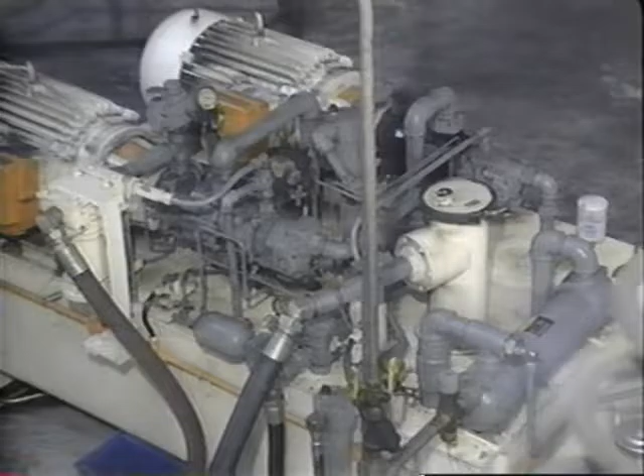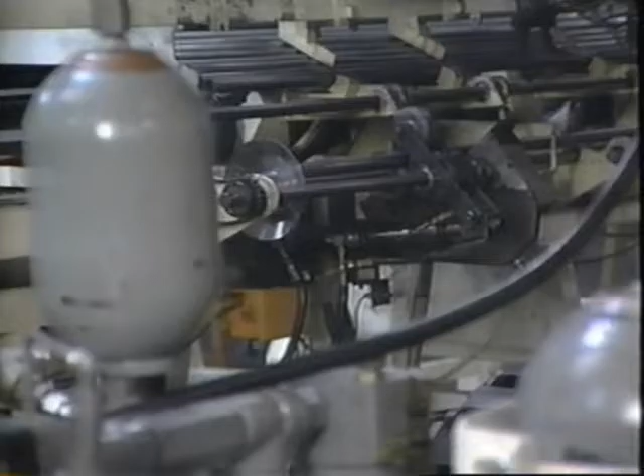Today we continue our study of industrial hydraulic technology with the hydraulic transmission of force and energy. In hydraulic systems, energy in the form of pressurized liquid flow is transmitted and controlled through a conduit system to an actuator at the point of work.

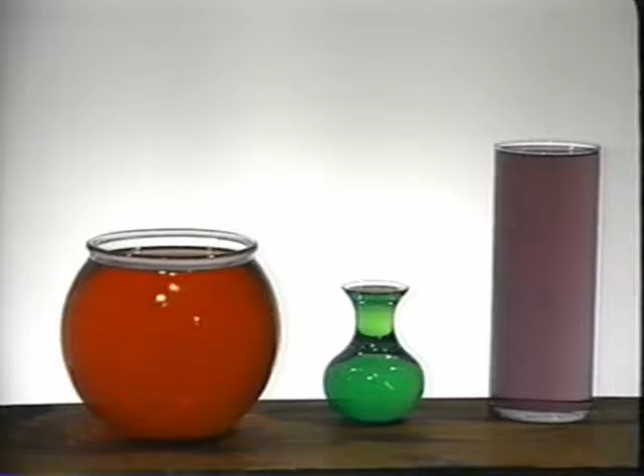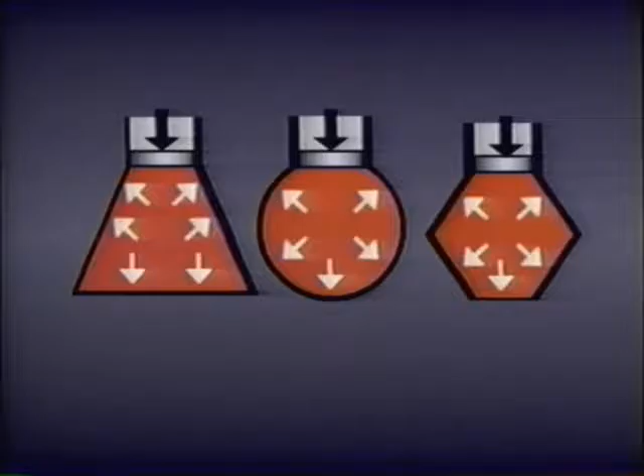Liquids have a few characteristics which make them an excellent means for transmitting energy. They take the shape of any container you put them in. They are relatively incompressible, and when a force is applied to a confined liquid, it is transmitted as pressure equally in all directions. This particular characteristic of liquids is called Pascal's law, named for the man who first discovered the relationship of force, pressure, and area.

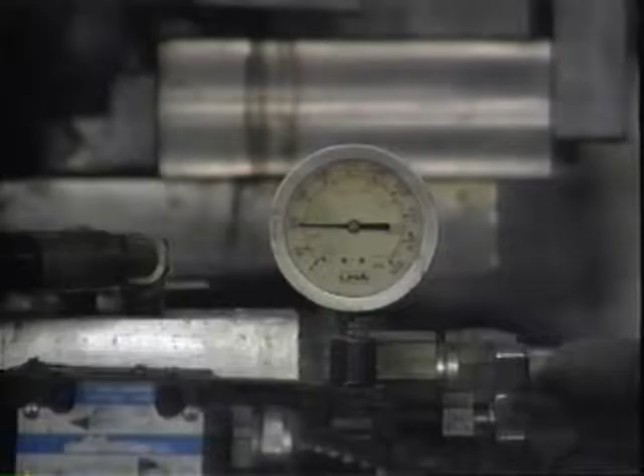Pascal's equation looks like this: pressure, usually measured in pounds per square inch, is equal to force in pounds divided by the area in square inches. Monitoring the pressure of the fluid is one way to determine how well the system is operating.

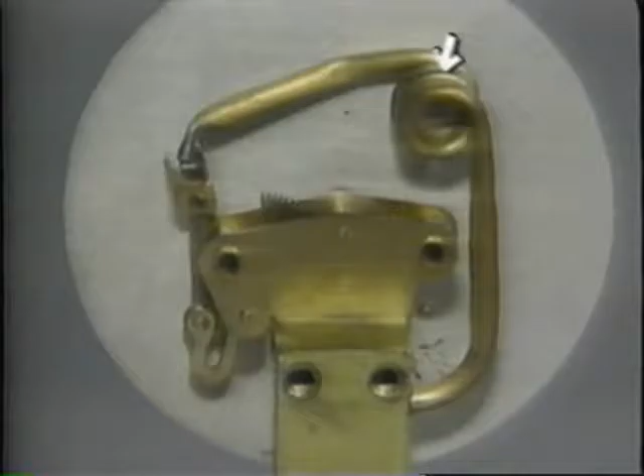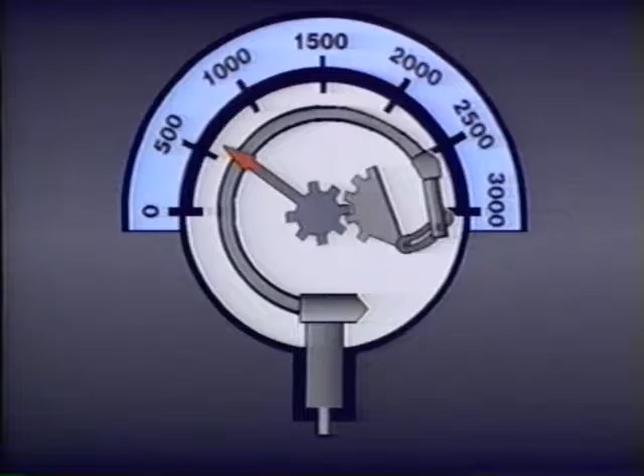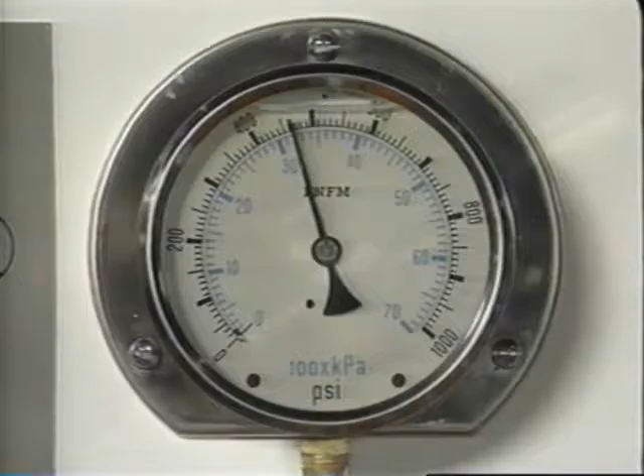Bourdon gauges are precision instruments, capable of readings as accurate as 1/10 of 1%. But they are relatively delicate, and the pulsations in most hydraulic systems could quickly damage them, unless some provision is made to isolate them when not in actual use.

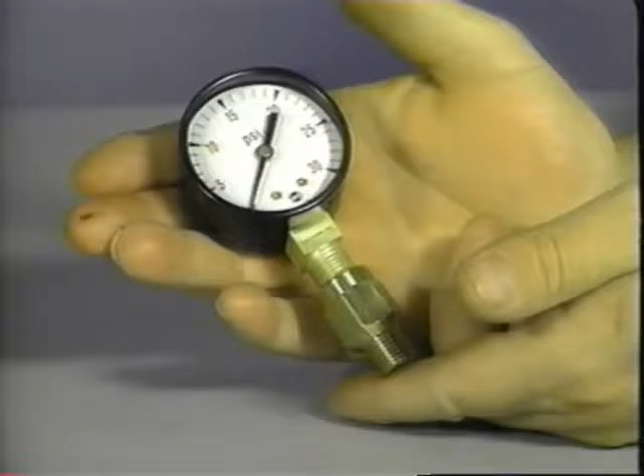Sometimes a device called a snubber is used. It's installed in the line between the gauge and the system. It works by stopping or restricting fluid flow to the gauge, so any pressure surges or pulsations are smoothed out before they reach the gauge.

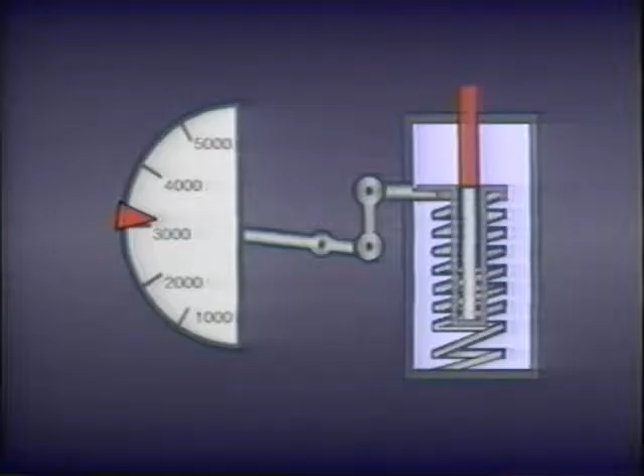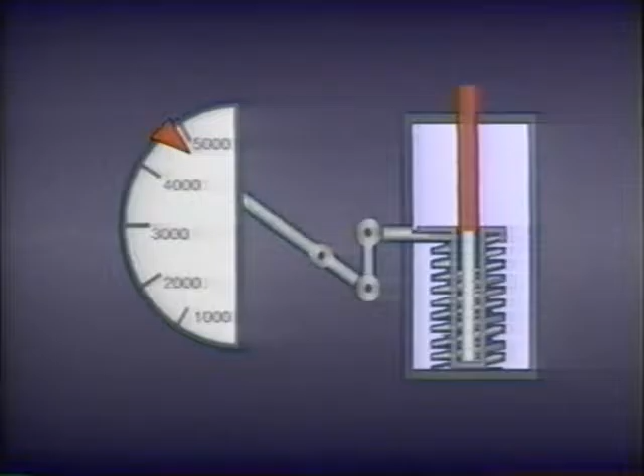The plunger gauge consists of a movable plunger connected to system pressure, a bias spring, a pointer, and a scale calibrated in pounds per square inch. As the pressure in the system rises, the plunger compresses the bias spring. As the plunger moves, so does the pointer connected to it, indicating the appropriate pressure on the calibrated face. While not as accurate as Bourdon tube gauges, plunger gauges are a more durable and economical means of monitoring system pressure.

Now, to convert hydraulic pressure into mechanical force, we can use various types of actuators. The most common type of actuator used in hydraulic systems is the cylinder. Hydraulic cylinders take hydraulic pressure and change it into a straight line mechanical force. This straight line force is frequently called linear mechanical force.

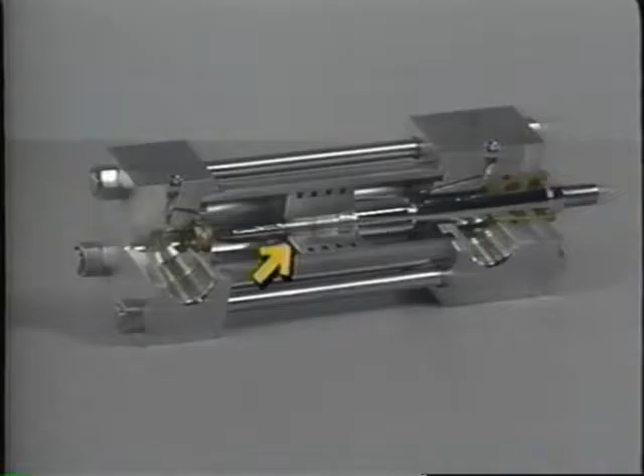Hydraulic cylinders basically consist of a cylinder body, a piston rod attached to a movable piston, and a closure at each end. This is called the rod end because the piston rod goes through it, and this is called the cap end. Most cylinders have holes called ports at each end. The inlet port allows the hydraulic fluid to enter the piston chamber, and the outlet port allows the fluid to exit.

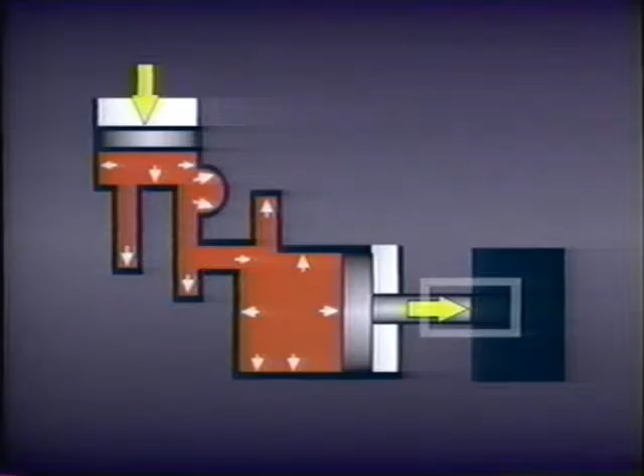When a force is applied at point A here, the resulting pressure is transmitted to the piston in the cylinder. The pressure pushes on the piston, resulting in a mechanical force here at point B. Remember that one of the major advantages of hydraulic systems is that they can be used to generate large mechanical forces. Let's say we want to use 5,000 pounds to move a 7,500-pound load.

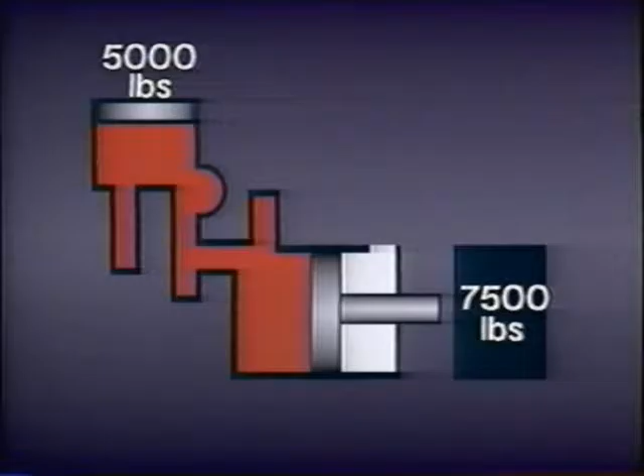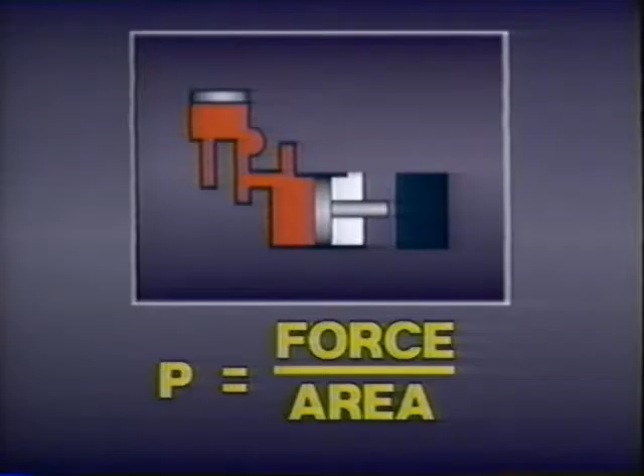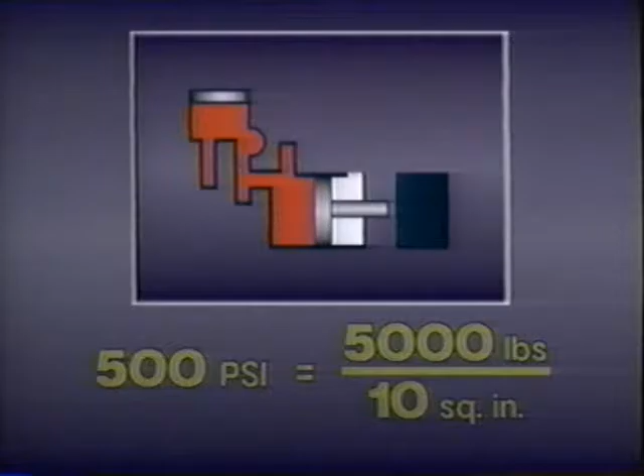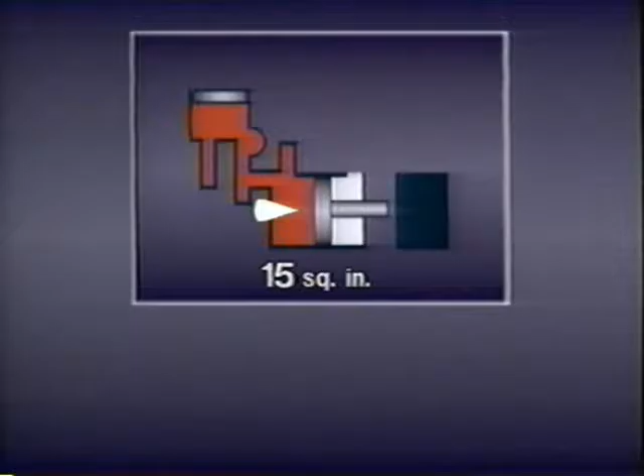Here at the input end, we apply a 5,000-pound force on a piston with a 10 square inch area. By applying Pascal's law, which says pressure equals force divided by area, we come up with 5,000 pounds of force divided by 10 square inches of area, which gives us 500 pounds per square inch of pressure in the system. So here on the other side of the piston, we have 500 pounds per square inch of pressure pushing against this larger piston, which has an area of 15 square inches.

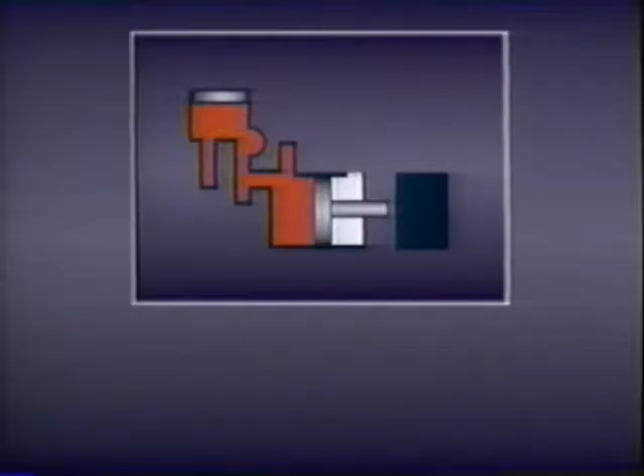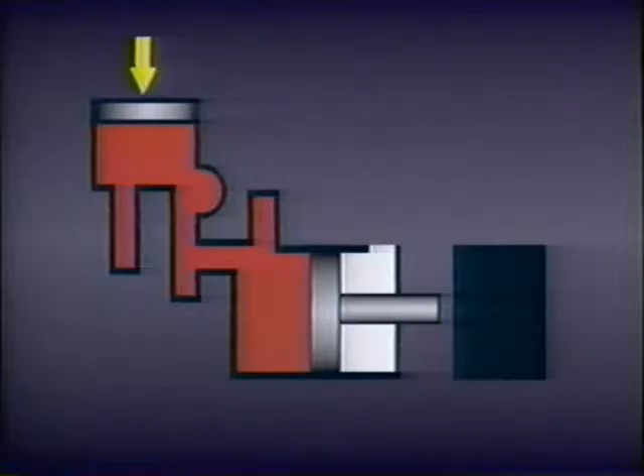Now, since we already know the pressure, we want to find the force here. Our equation becomes force equals pressure times area. So our output force is equal to 500 times 15, or 7,500 pounds. We are able to increase the force of a 5,000-pound weight enough to move a 7,500-pound load.

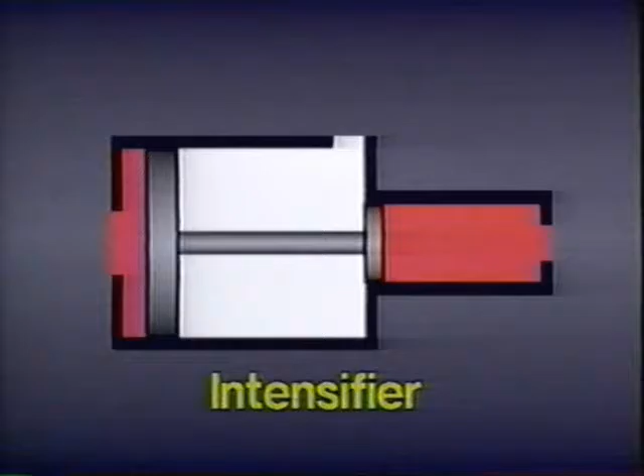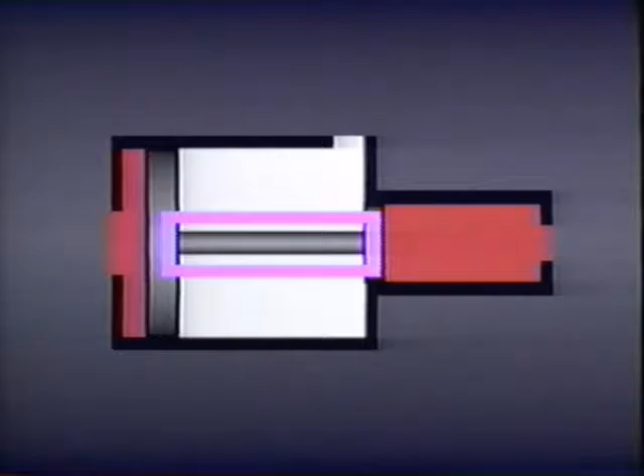Sometimes we need to increase the hydraulic pressure in a system. We can do this by using a device called an intensifier. Basically, an intensifier is a big hydraulic cylinder and a small hydraulic cylinder whose pistons are connected together with a piston rod.

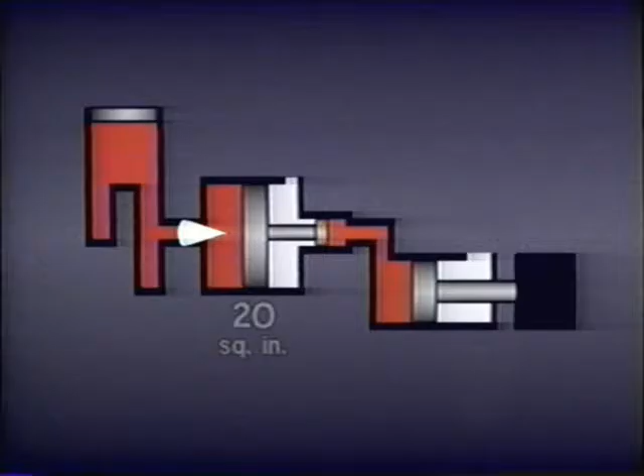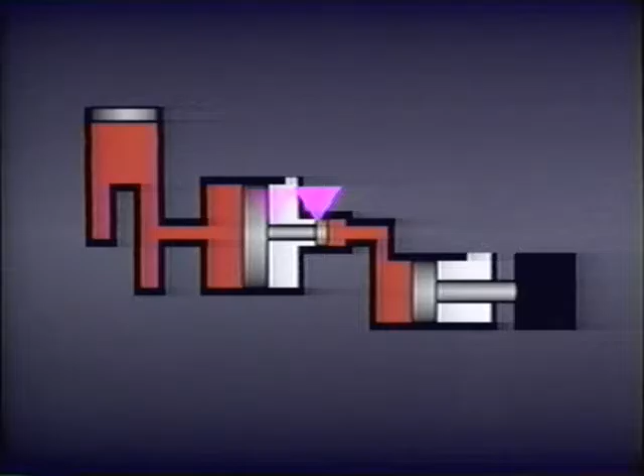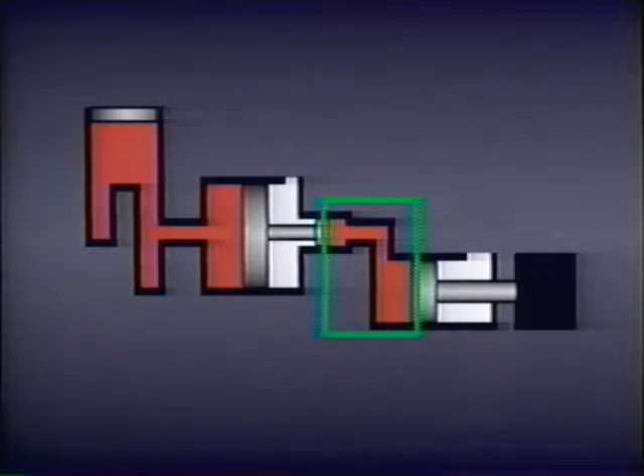To show how it works, let's apply an initial hydraulic pressure of 500 pounds per square inch against this large piston, which has an area of 20 square inches. This gives us 20 times 500, or 10,000 pounds of force, which is transmitted through the rod to the smaller piston at the other end. The 10,000-pound force is now being applied across only 5 square inches of surface, creating a pressure here of 2,000 pounds per square inch. So our initial 500 psi pressure has been intensified to 2,000 psi at this end.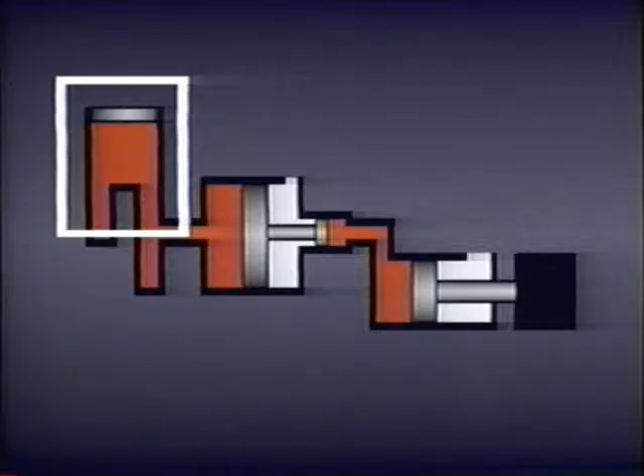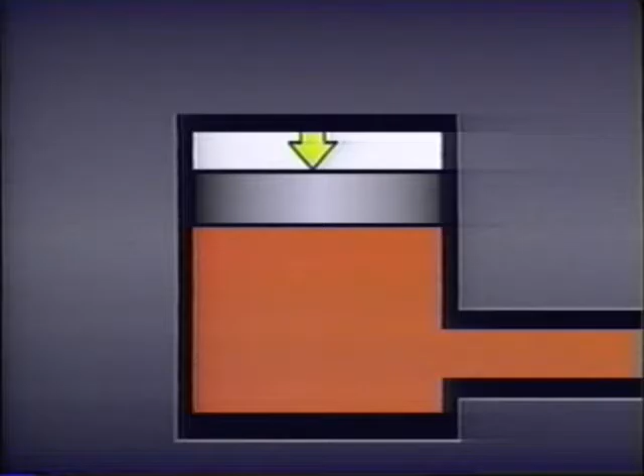Up to this point in our examples, we've used a force on a movable piston to generate our pressure. This device is called an accumulator. An accumulator stores hydraulic pressure as potential energy. This stored pressure can be turned into working energy, that is, flow and pressure.

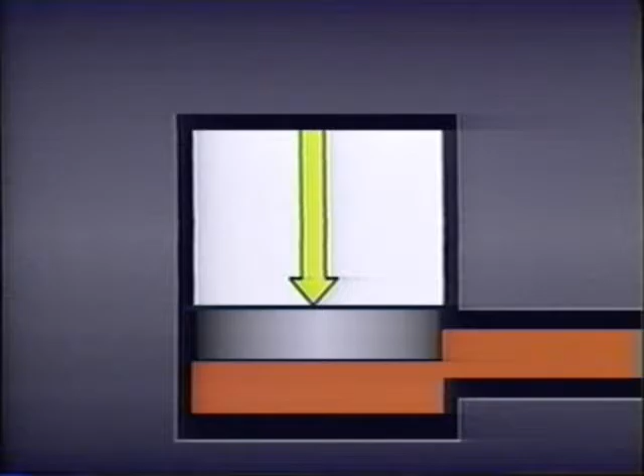One of the drawbacks when using an accumulator is that it has a specific capacity. Once its fluid is used up, the work stops. To get around this, we need a way to provide a continuous flow. The device we use to do this is called a positive displacement pump.

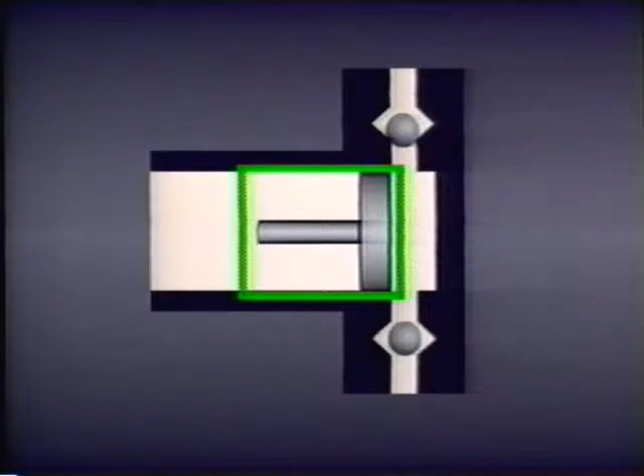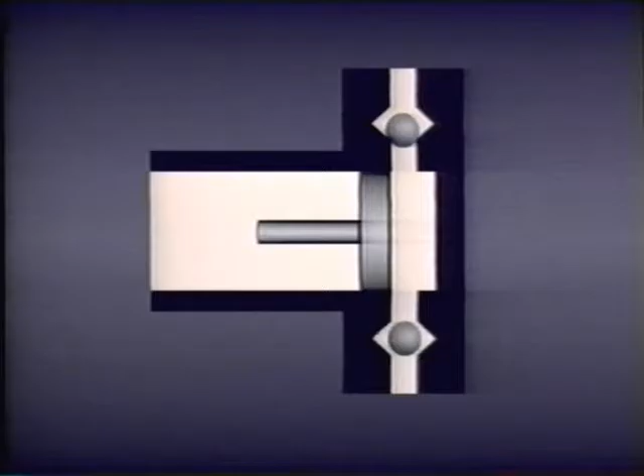It has a plunger encased in a housing. The plunger is connected to a source of power, usually an electric motor, which moves it back and forth. There are valves connected at both the inlet and outlet ports, which allow flow in only one direction at a time as the plunger moves.

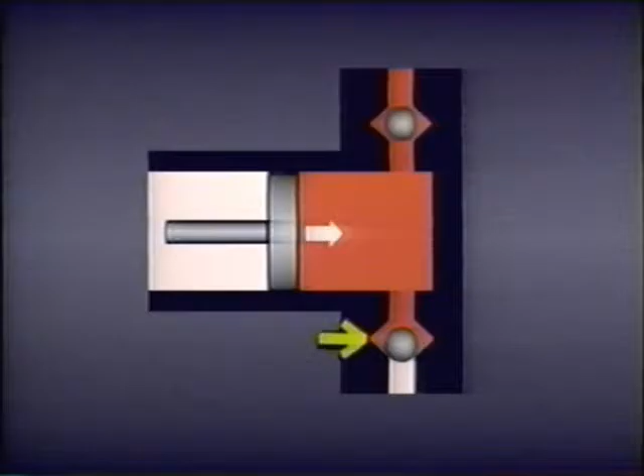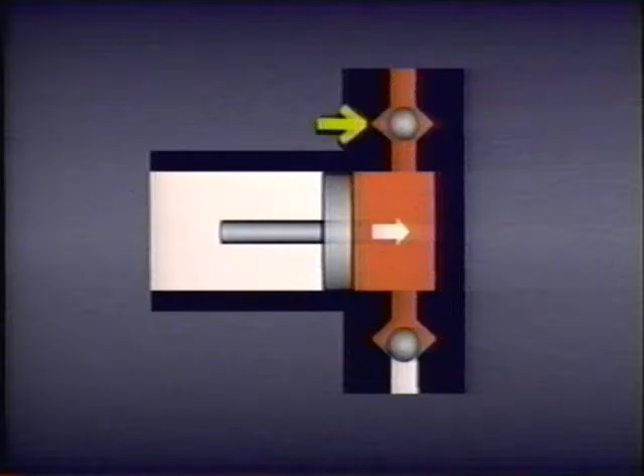When it moves in this direction, the volume inside the chamber increases. The inlet valve opens and fluid from a reservoir is pulled in, filling the chamber. When the plunger reverses direction, the inlet valve closes, and then as the volume in the chamber begins to decrease, the outlet valve opens, allowing the plunger to force the fluid out into the system.

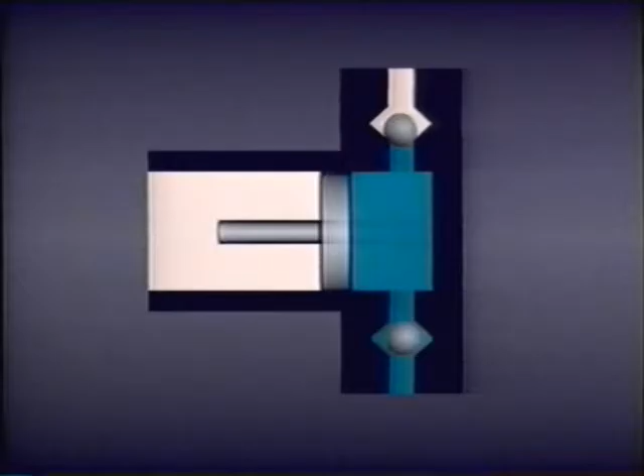As the plunger cycles in and out, an intermittent or pulsating flow is produced. Although reciprocating plunger pumps have a place in industry, usually in very high pressure applications, a more commonly used positive displacement type pump is the rotary pump. It's basically a housing with inlet and outlet ports and a rotating group which develops a smoother fluid flow and pressure. One style is the vane pump.

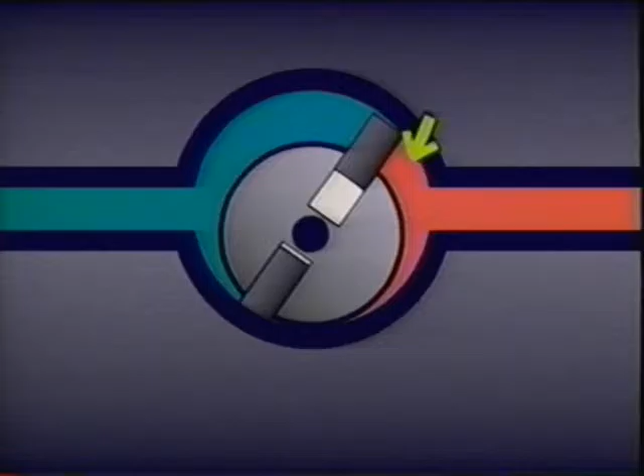In its simplest form, it looks like this. The rotating group consists of a rotor and movable vanes. The rotor is offset to one side of the housing, and the vanes are free to move in and out. When the rotor is turned, the vanes are thrown outward by centrifugal force, forming a positive seal here. The increasing volume here on the inlet side allows liquid to fill this area, while the decreasing volume on the outlet side here forces the liquid out into the system.

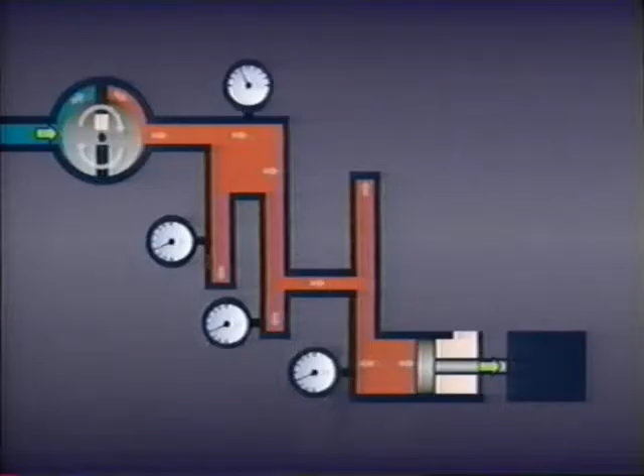In a hydraulic system, there is a direct relationship between pressure and resistance. How much pressure a pump develops depends on how much resistance it encounters. This resistance basically comes from two sources: the object's resistance to being moved and the fluid itself. If there were no fluid resistance, the pump would only have to generate enough pressure to overcome the object's inertia and friction. However, since fluid resistance is always present in a hydraulic system, the pump has to produce more pressure to overcome it.

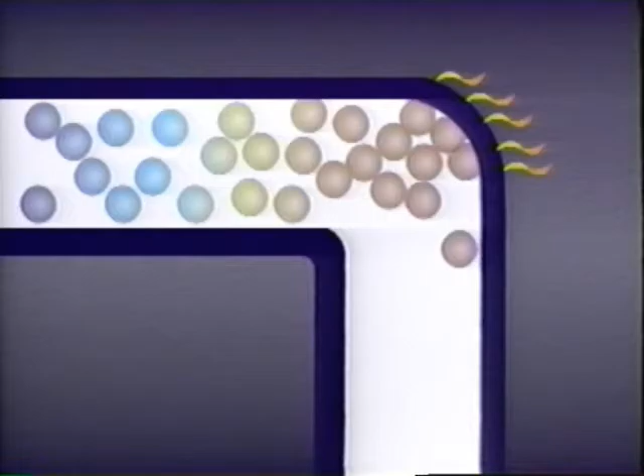Notice that the gauges indicate highest pressure here, close to the pump, and decreasing pressure here, here, and here, the farther we go along the system away from the pump. Since energy cannot be destroyed but can change form, this loss of pressure shows up as heat. It is caused by the friction of the molecules of the fluid rubbing against each other and the walls of the system piping.

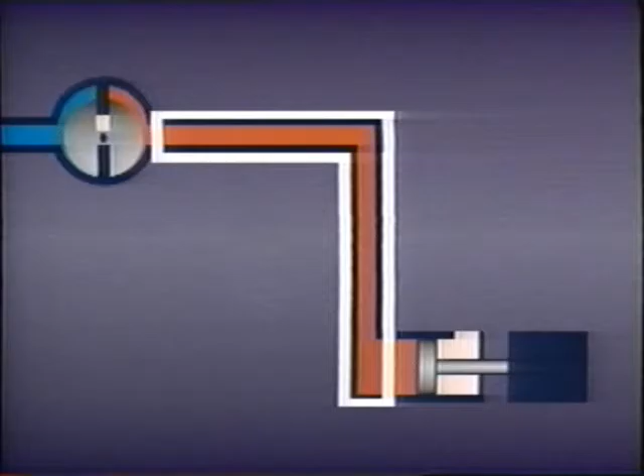Hydraulic systems can be designed to reduce heat generation by minimizing the number of bends in the line and by using the proper size tubing. Altering the size of the tubing can affect both the flow rate and the velocity of the fluid in the system.

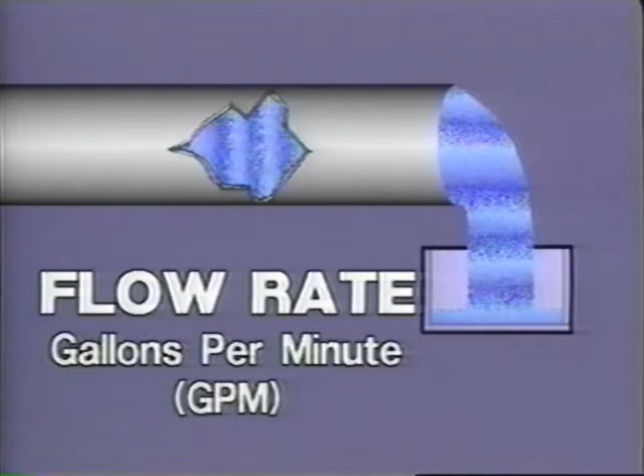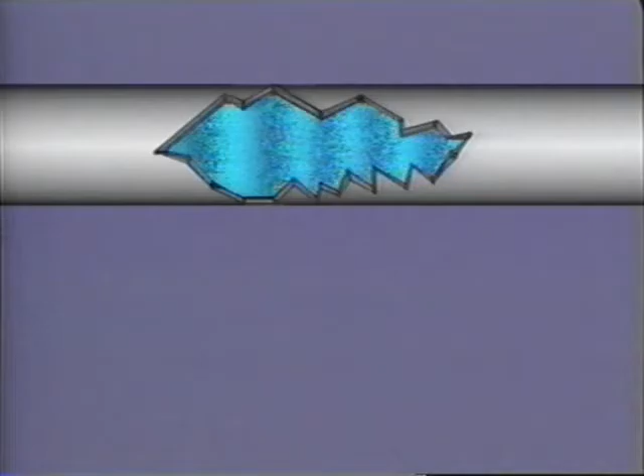Flow rate is the amount or volume of fluid which moves through the system. It is usually measured in gallons per minute or GPM. Velocity is the speed of the fluid as it moves through the system, usually measured in feet per second. Increasing either the flow rate or the velocity will increase the friction, and therefore the heat which the system generates.

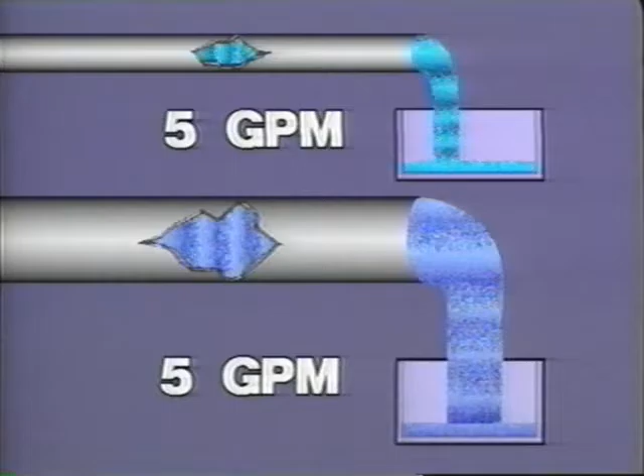The relationship between flow rate and velocity can be shown with these two pipes. If we want the fluid to move through both pipes at a flow rate of 5 gallons per minute, the fluid moving through the smaller pipe will have to move faster than the fluid in the larger pipe. The additional friction caused by the faster moving fluid will create more heat.

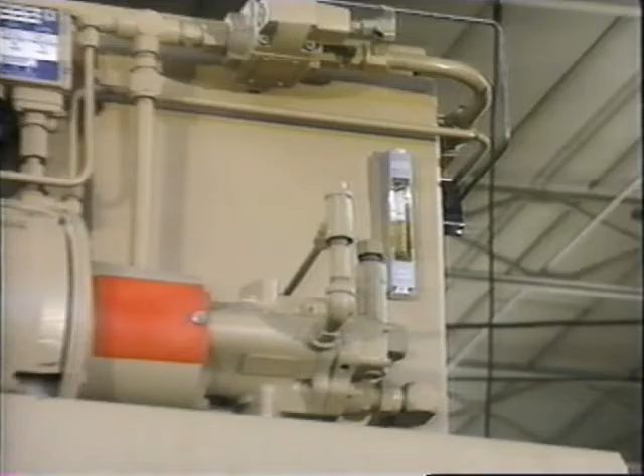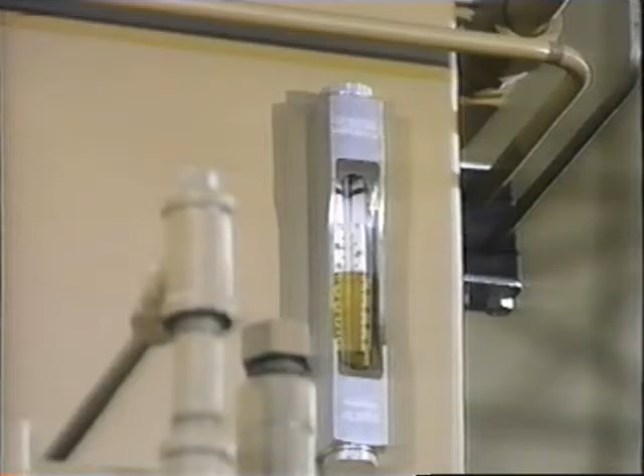Another factor that influences the efficiency of a hydraulic system is the hydraulic fluid that's used. In our next lesson, entitled Hydraulic Fluids, we'll take a close look at the various characteristics of hydraulic fluids and the effect they can have on hydraulic systems.